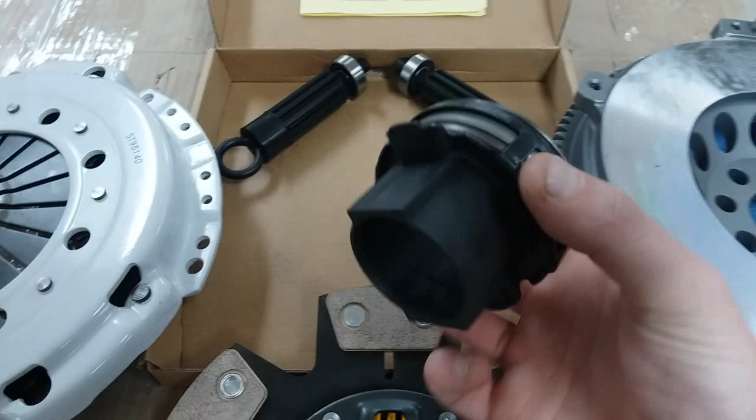The only thing in here that is not good quality, there's two things. This kit includes a replacement throwout bearing and 2 sizes for pilot bearings because the E36 had 2 different engines and stuff. So I went to FCP Euro and just bought a better quality throwout bearing because this one seems fairly cheap, I don't want to use it. Then also these pilot bearings - this is going to be my size here.

I was inspecting it, and it says made in China - right there's China, and the brand on it I think was WJB. I know it's not going to focus on it, but I did my research, and there's not much information on these out here besides them being sourced from China. So I do not want to use cheap bearings.

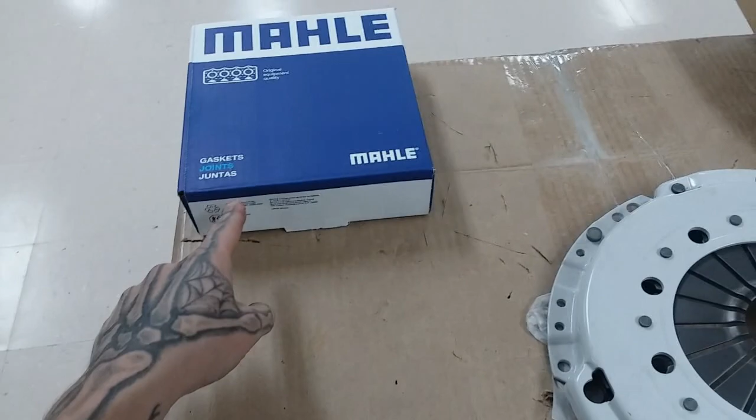So I got new ones overnight shipped from FCP Euro. Also got a new Guibo from them since my other one's too big. And then we also got a new rear main seal. That'll be going on first before the clutch kit, and then the new pilot bearing will go in before the clutch.

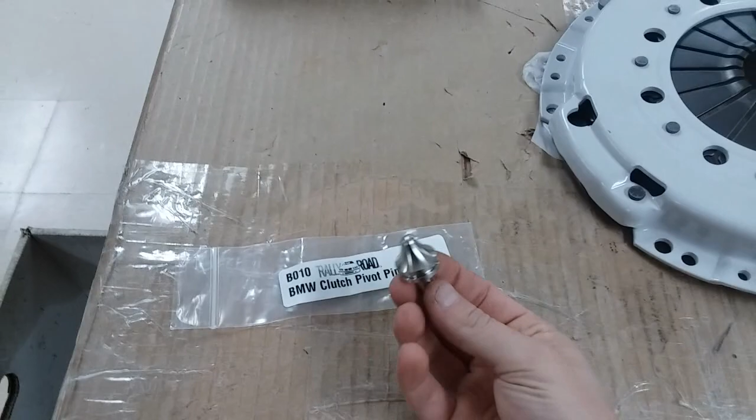I also got a stainless steel pivot pin from Rally Road. This is an upgrade versus the stock one. Since this clutch is going to be a lot stiffer to actuate, there's going to be more stress on this pin. So instead of going with the usual brass one, I looked them up on some forums - people complained how they wore and how soft they were. So I went even harder and got stainless steel. This thing should barely wear down, if any, so that's a good upgrade. It's from Rally Road, awesome website by the way.

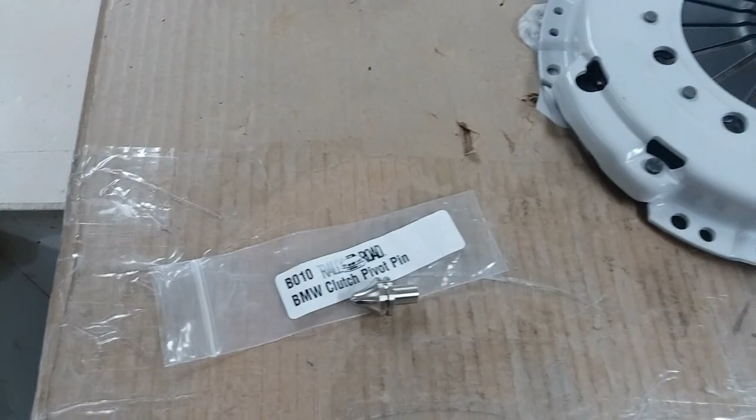So yeah, this clutch should hold fairly well for the time being until I can afford the twin disc once I get moved into my new place. The next clip you'll see is probably me installing the rear main seal. So once I get changed and over to the garage, I'll get right on it. I'll see you guys soon.

Alright, and here is our new rear main seal installed on the engine. If you're going to install this rear main seal while it's on the car, I had the housing and everything off, so this gasket back here is new as well. Now, since the engine is mounted kind of sideways, and whenever the oil pan's full of oil, your oil level is going to be right here, right at this crevice. So when we have this all apart, you obviously want to make sure the mating surface is nice and dry for the new gasket maker.

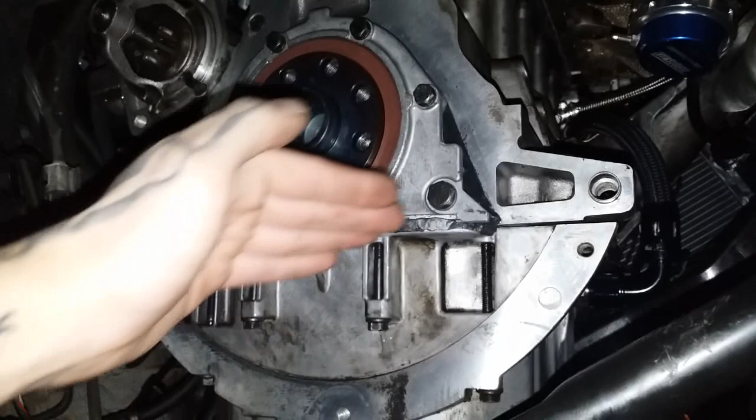It was impossible since the oil was right here, it kept making everything damp. So I had to drain the oil - I need to do an oil change anyway.

Another reason why I drained the oil is because BMW uses thread sealant on their flywheel bolts right here, because the rear part of the crankshaft, as you can see, is hollow. So I imagine if it really wanted to, oil could walk through the threads of the bolts and slowly make its way into the transmission. So BMW uses a bunch of thread sealant.

So what I did was I made sure I got these threads nice and clean and dry for the sealant I'm going to apply. I had to use a bunch of brake cleaner through every hole, and then I had to take a pick and break some stuff out of there and everything - it took a few minutes. So with a bunch of brake cleaner now in the engine, I wanted to drain the oil. Brake cleaner evaporates, but still I had quite a bit in there, so I just wanted to drain the oil to make sure.

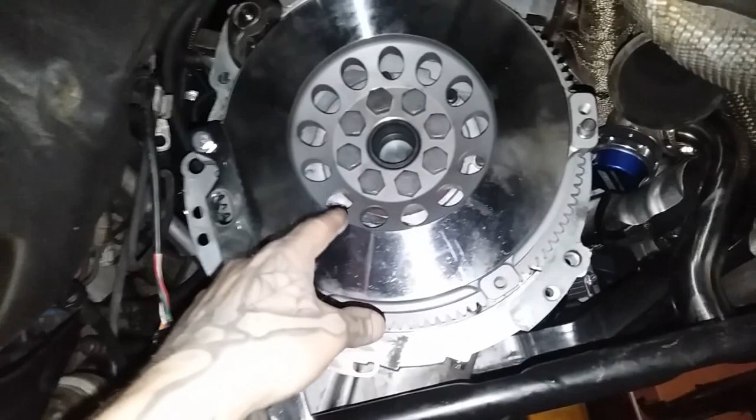Here we have the single mass flywheel now bolted onto the crankshaft. Okay, so what I did was I put the flywheel up there. Since there's a dowel pin in the crankshaft, there's also going to be a larger hole in the flywheel. Just line it up, stuck it on, and that held it. Then started a couple bolts by hand after adding my thread locker and stuff, the thread sealant.

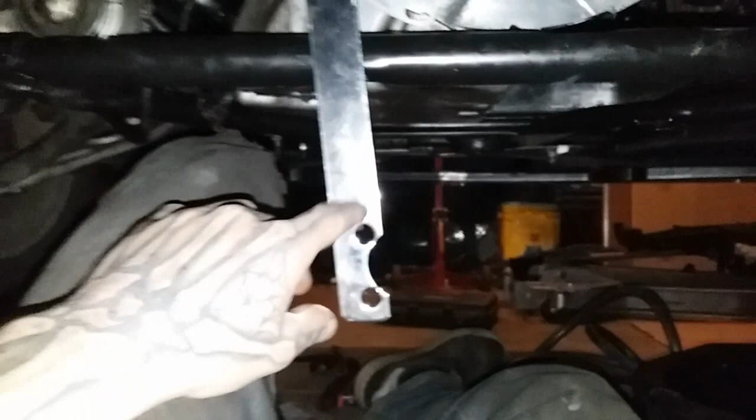And then once all the bolts were in, on the lowest setting on the impact gun, went around and did some quick zips just to get this flywheel seated. And then since I'm by myself and I needed a way to torque all the bolts, I just got a piece of metal. This just so happens to be a fan clutch removal tool for E46s and Audis. And I bolted it to the flywheel using an old bolt. And then these pegs that hold the pressure plate, I just rested against that. And then used my leg, like that, to anchor it while I was torquing all the bolts.

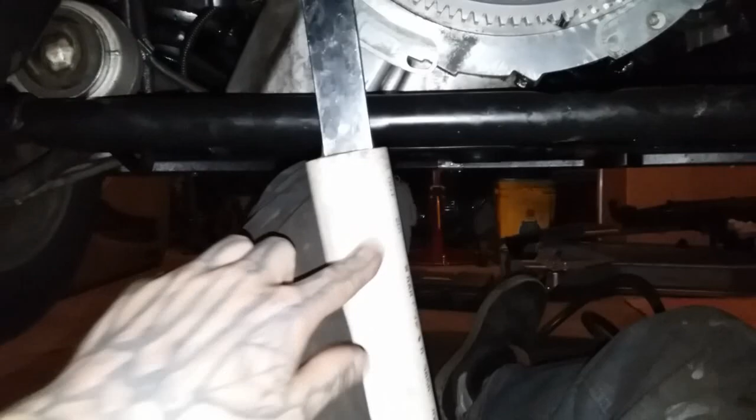Now, this hurt my leg, so I just got a piece of PVC pipe here and kind of sleeved it over like this, and then rested that again like that, and that was a lot more comfortable. It worked freaking amazing. So you can see, look at that, I'm moving it with my leg. So your legs are pretty strong. So once that was held by my leg, I put the torque wrench on here and had both my hands free to click, click, click, go around and tighten them. Okay, so that was basically it.

Now, if you guys install a single mass flywheel or twin disc clutch or whatever, it's very important to contact the company that you bought the clutch kit from and ask them what torque specs to use if the instructions don't specify. So I contacted this company and they just used the stock torque specs. The stock torque spec for this was 77 foot-pounds. Just to be safe, I cranked it up to like 81, 82. Because it is a single mass, it could be a little more harsh. Don't want any bolts backing out.

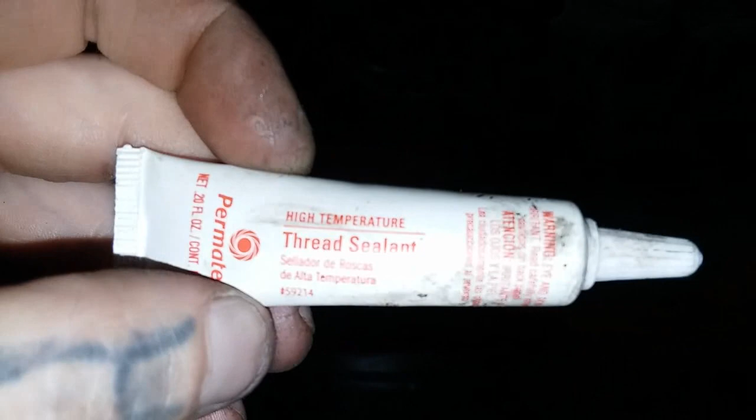So I decided to use some thread sealant on the first couple of threads, this stuff, and then after those couple threads, I used some high temperature thread locker and high strength thread locker. So this flywheel should be solid now. All right, now it's time to install the clutch disc and pressure plate. I got my pilot bearing installed.

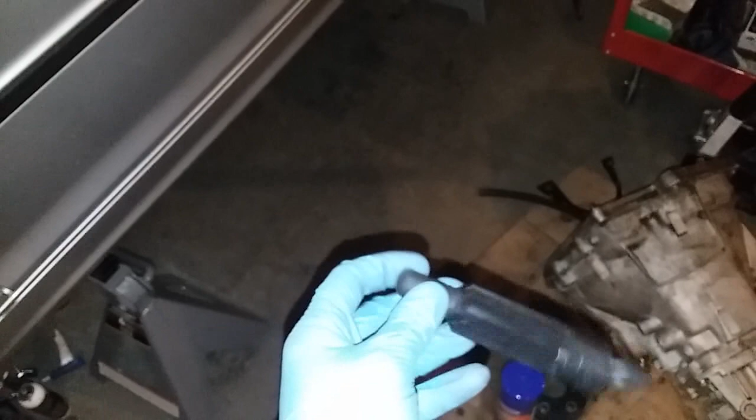This clutch alignment tool that was included in my clutch kit was very loose in the pilot bearing, it was just wobbly. So I tried black tape and everything else, but I couldn't get it to fit properly. So I just put a piece of heat shrink over it, and I worked the bearing back and forth. See how it scrunched this? The bearing should come in about this far now. So this is a lot tighter fit with that heat shrink on there. Now I'm going to install the clutch disc and pressure plate.

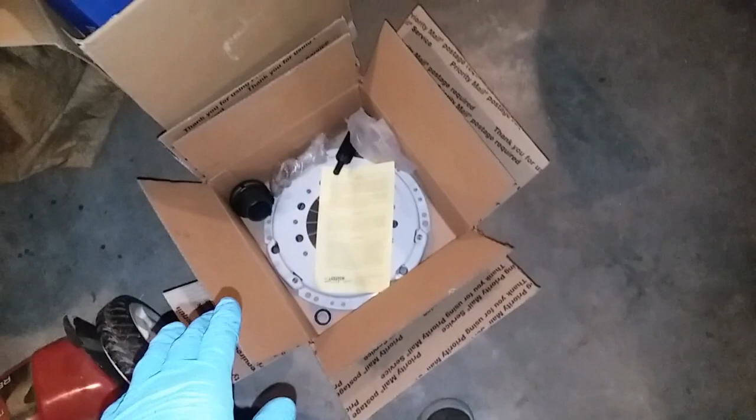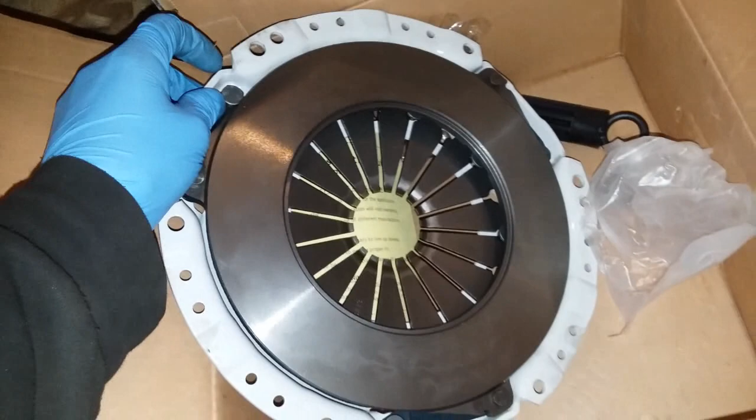But before that, you want to clean off the flywheel with some brake cleaner and clean off the contact surface of the pressure plate, this contact surface right here. Whenever they ship this stuff, they put a rust inhibitor on it, and you do not want any grease or any kind of oil on those mating surfaces. So I get everything cleaned up, and then I'll put the clutch disc in and then the pressure plate. Another thing is to make sure before you put your clutch on that your clutch disc does indeed fit your splines. That's very important.

Before you go ahead and seat your clutch disc, it's always a good idea to double check and see if the company has written on the clutch disc what side to face the flywheel. And thankfully, this company wrote flywheel side for me. So on this particular clutch, the protruded end of the disc will go into the flywheel.

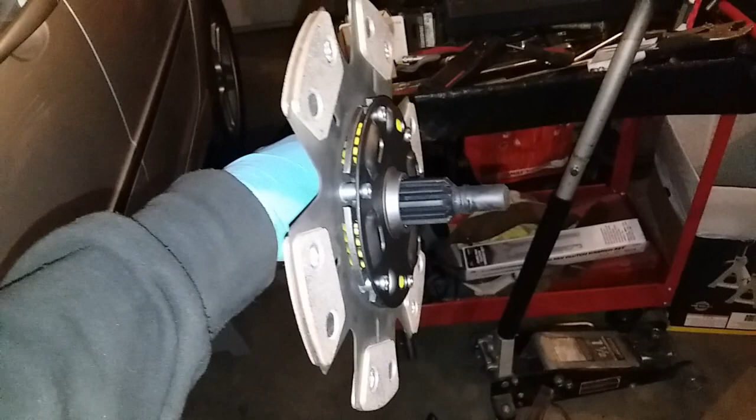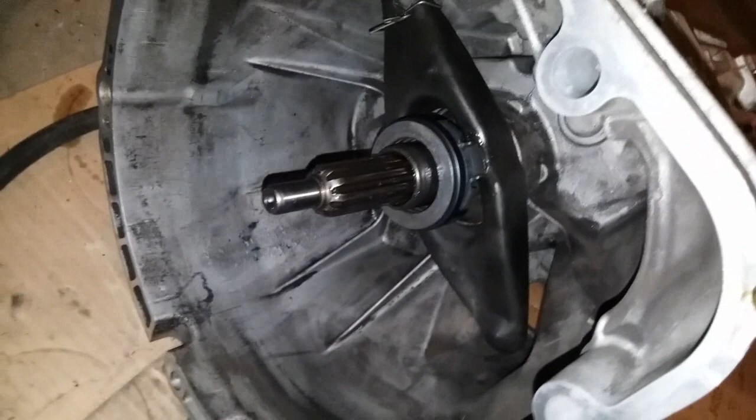Some companies don't label their clutch discs, so I've seen on forums people put their clutch disc backwards. And what happens in these cars if you do that, the throw-out bearing guide tube will actually hit the clutch disc, so that'll cause binding and everything. So yeah, just always make sure you're putting on your clutch disc in the right direction. I'm going to put this thing in, and I'll be back in a few seconds.

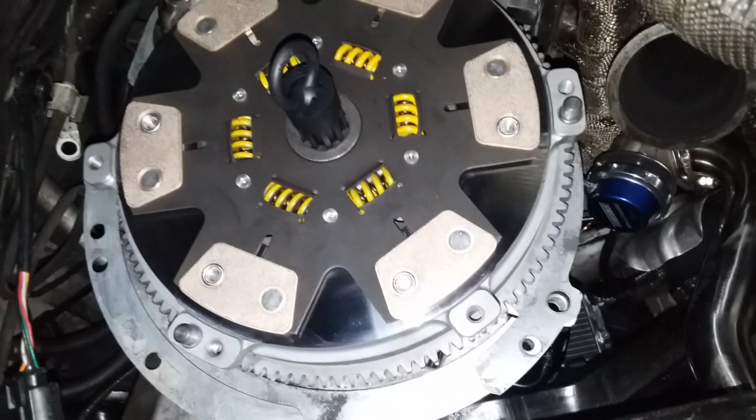And there is our clutch disc installed into the flywheel. Got our tool holding it nice in the center. I'm going to prepare the pressure plate now, clean it, and then put it on.

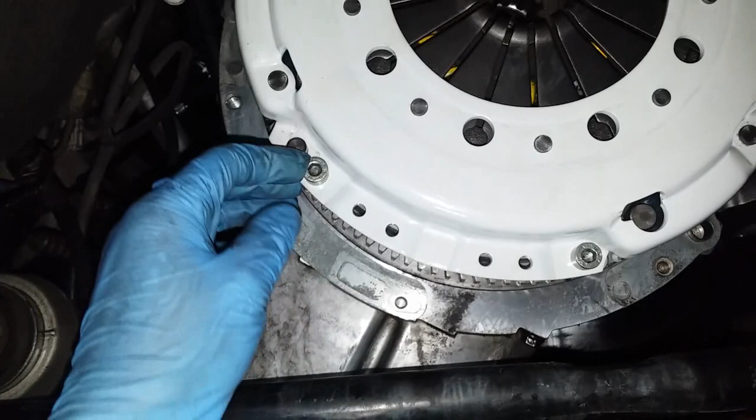And here is our pressure plate installed onto this clutch. Now, the torque spec they called for was 25, but I added 5 more, so now they're 30 foot-pounds. And I also added some thread locker to these bolts. Usually use blue, but I decided to use red just to be safe.

Usually, also, I do not recommend reusing pressure plate bolts, but since these are stainless steel and high-quality bolts, they're just fine to reuse. And always make sure you're tightening in a crisscross pattern to evenly get the pressure plate to clamp down, because you don't want to start here, just like you're tightening a wheel on a car. You want to get even torque.

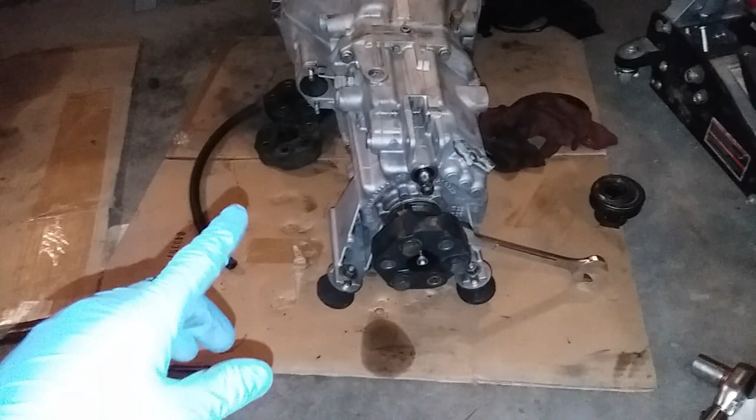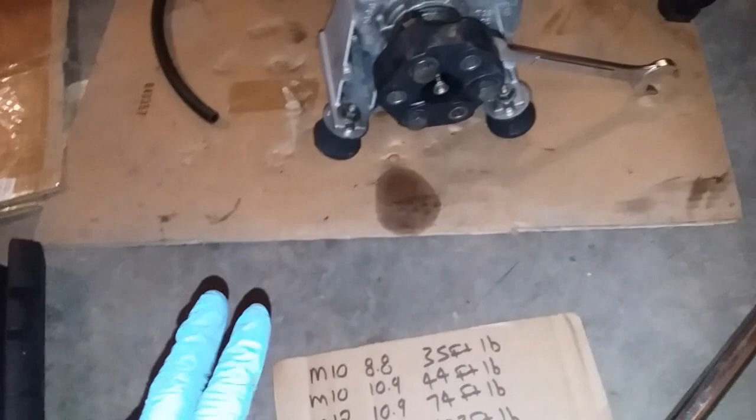Okay, so currently I am preparing the transmission before it goes back into the car. So working at the back, right now I am installing the new flex disc. So there's going to be 2 things to note. The first thing is going to be what torque spec you use, and then we'll get to that in a moment. The second thing is, if your new flex disc has these little arrows on them, you're going to have to make sure you install it properly.

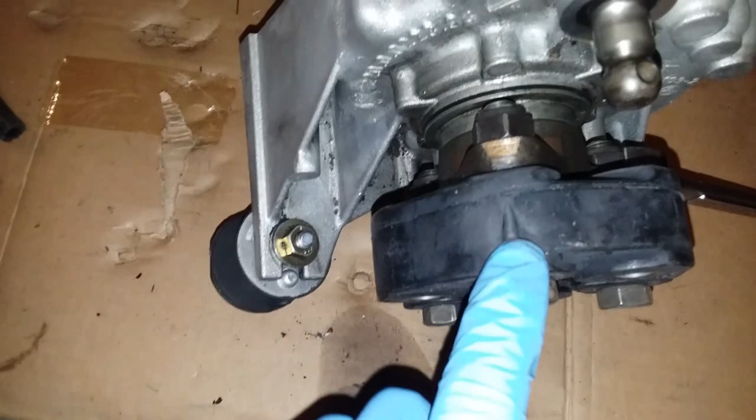So these little arrows here always point towards the flanges that they're mounting to. So this arrow is pointing to the flange of the transmission. And the next arrow, let me spin this, it'll be pointing back to the flange on the drive shaft. So if the back of this arrow was facing this flange, that is wrong. It is incorrect. So you must make sure your arrows are pointing to the flanges on which it is mounting.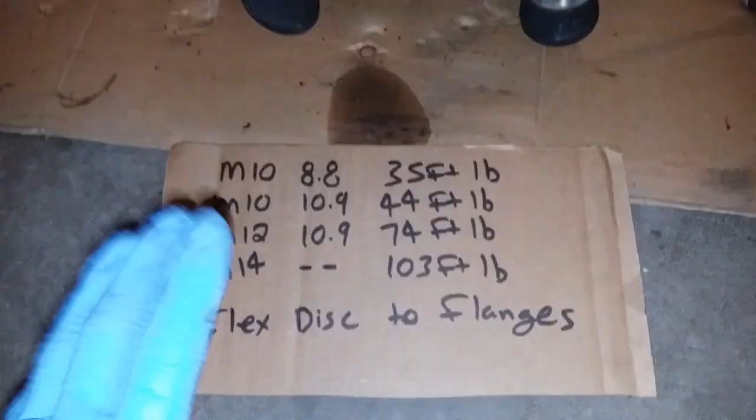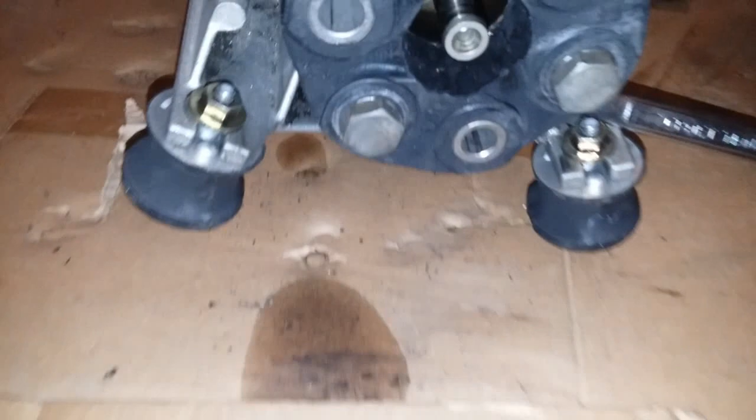And then the torque spec thing, there's actually a wide variation of torque specs for these bolts depending on what bolts you have. This is the size, so M10, M12, M14. The more common ones, at least I believe so, are going to be this torque spec right here, 74 foot-pounds. This is the more common bolt. So just by looking at the bolt, you inspect it, and you'll be able to see the numbers on them.

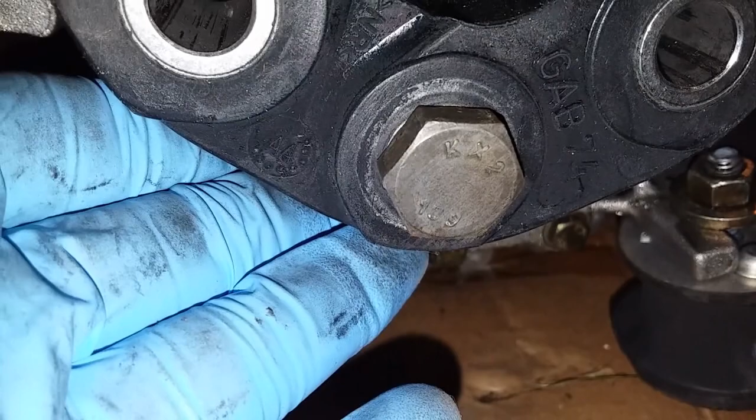I don't know if you'll be able to read them or not, but these are indeed a 10.9. See the 10.9 on there? On the bottom? It's a 10.9, and is the M12 bolts. So my torque spec is 74 foot-pounds. I'll just leave this up right here, so in case you guys want to screenshot it or whatever for a few seconds, so you guys can see.

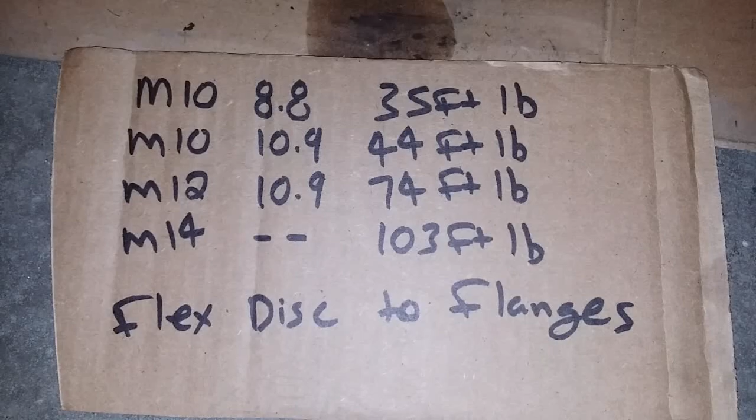Alright, so those are all the torque specs for the flex disc. So I'm going to torque this down with my torque wrench, and then I'm going to go to the front and install my throwout bearing and the pivot pin there and all that.

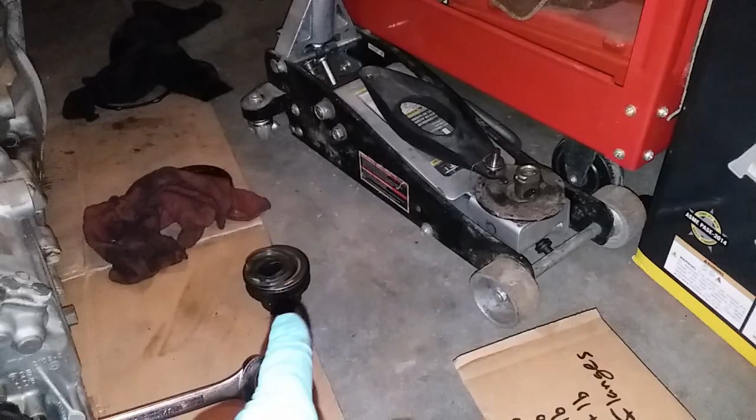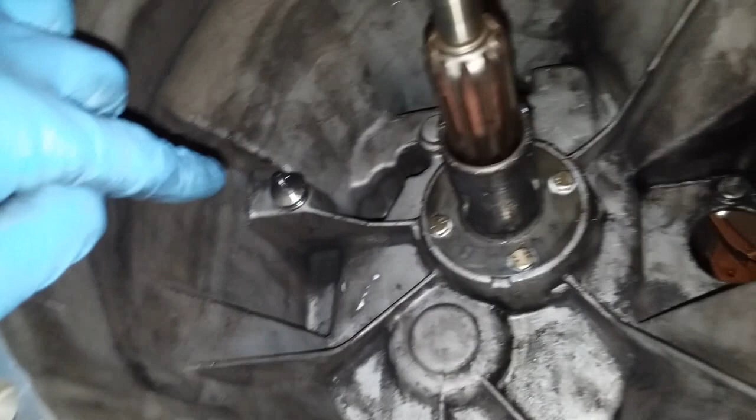Okay, now we're working at the front of the transmission. Just installed our stainless steel pivot pin, and I have some grease on it. And then I did replace the input shaft seal yesterday and reinstalled this guide tube with some thread sealant on each bolt, because that's how it was from the factory. Now I also have grease on the guide tube. Lubed up the throwout bearing. It's nice and greased up.

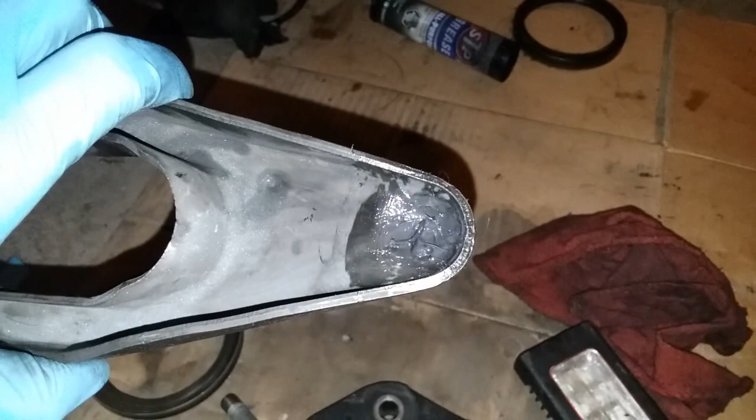And then our clutch fork, both sides are greased. Ideally, you want to use either a Q-tip or a flathead screwdriver to get a nice ball of grease right down that little hole. It's hard spreading with your finger because it just sticks too much, so you want to use some kind of tool to actually get it in that hole. So now I'm going to install the clutch fork onto the pivot pin and then put the throwout bearing in. And that's going to be simple as that.

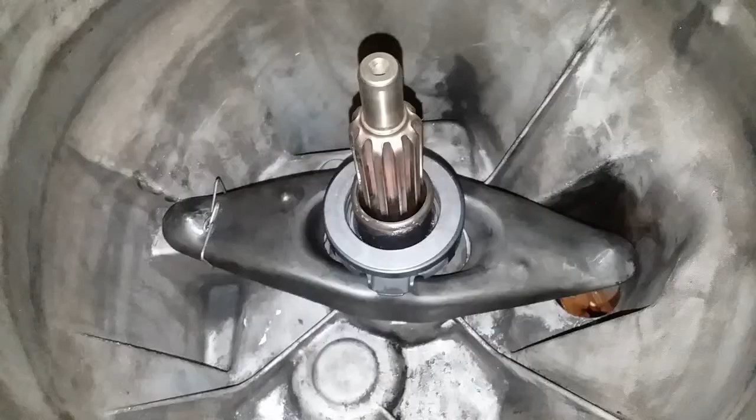We're back now, and the clutch fork and throwout bearing are installed into the transmission. Now, usually you want to install the pin onto the fork with the spring and then put it in, but in this case, the stainless steel pivot pin was a very tight fit in there, so I actually had to take a socket and extension and pound it down because it's supposed to sit flush on that lobe down there.

So then I put on the fork over top of it. It was kind of a struggle getting the spring over. So I mean, what you could do is you could probably take a drill and slightly notch out that hole some so it fits in there nice. But this worked out fine.

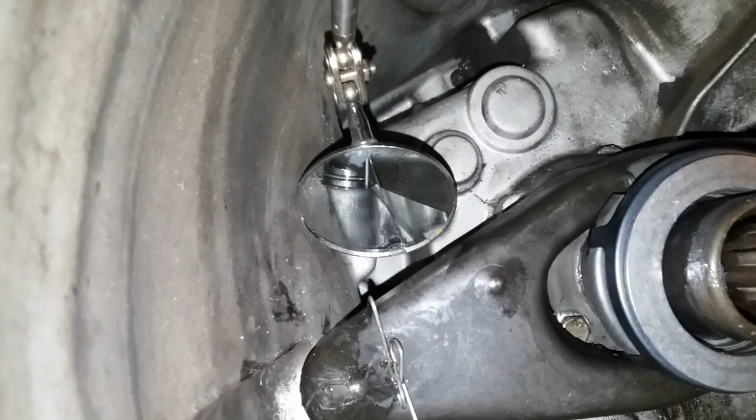And then just to verify you got a good fit, make sure the spring didn't pop off from underneath. Just take an inspection mirror. See the spring's in the groove still of the pivot pin. So that's important so it doesn't fall off. So yeah, it's always better to have the pin on and then put it as one assembly in. But sometimes, I mean, it worked out either way.

You also want to put some grease on your splines here. As you can see, my grease is black. So I actually have it inside the splines and a very thin film on the outside, so the clutch disc can slide in there nice and freely. And then also a nice thin coat of grease on the tip of the input shaft, because the bearings are pretty tight tolerances and they fit on there just right. So you want to make sure you have a little bit of grease on there so the transmission slides back onto the engine nice and freely.

The transmission is reinstalled. Yeah, I tried using my transmission jack, but it was too big and bulky, so I literally installed this transmission by hand. I just picked it up off my body and slapped it onto the engine, went on nice and smooth for the most part, and then reinstalled the cross member, which I cleaned up a couple days ago.

Now the next step after that was to install the selector rod again, and then now I'm going to install the drive shaft. One thing to note is that your drive shaft during removal will sometimes seize on here because the middle portion gets corroded and a little cup sits in there, so it rusts up. So I had to beat it off with a hammer, a couple good hits, and it finally came off. That with a pry bar too.

So what I did was I did a quick brush and put some grease on the outside here. This is actually a mix that I use all the time. There's the bucket out there with the paintbrush hanging out. That is a mixture of ATF and grease. It leaves a really nice consistency, and those two together are a nice rust preventative. So I also brushed off the back of the drive shaft and I also added my mix to it, so it's going to assemble nice and smooth now.

And then I'm going to show you the proper torque specs for these bolts, depending on which differential you have and stuff. And I'm going to show you how to properly install the drive shaft and how to properly preload the carrier bearing. Because a lot of guys just throw the drive shaft back on. You're supposed to do what's called preload the bearing, and I'll show you how to do that. And then we'll get these bolts nice and torqued up. So yeah, let's get the drive shaft in.

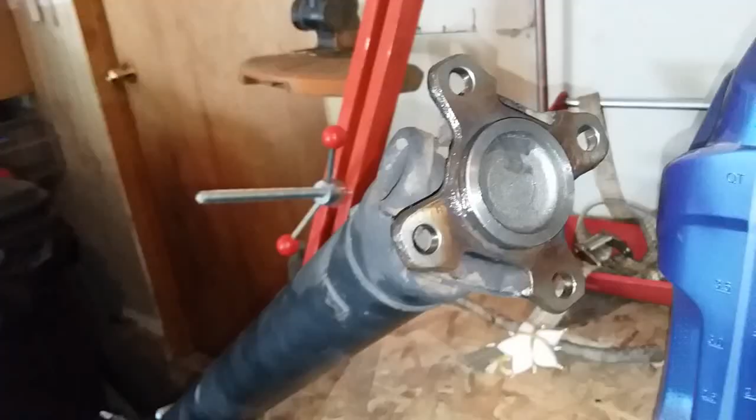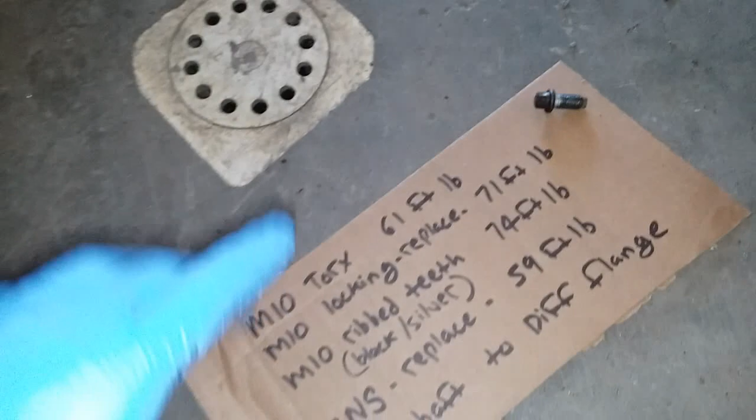Here is that section of the drive shaft I was talking about. This mounts to the rear differential. It's this cup right here that corrodes and gets stuck in the diff mounting flange. So as you can see, I brushed it off with a wire brush and my lubricant is on it. And now the bolts. Keep in mind my drive shaft is the 4-bolt mounting. So here are the torque specs. In my case, there's one of my bolts right there. I have the standard M10 Torx, so 61 foot-pounds.

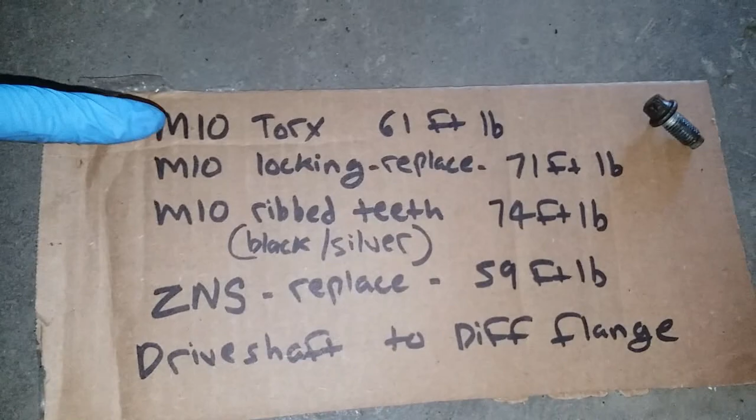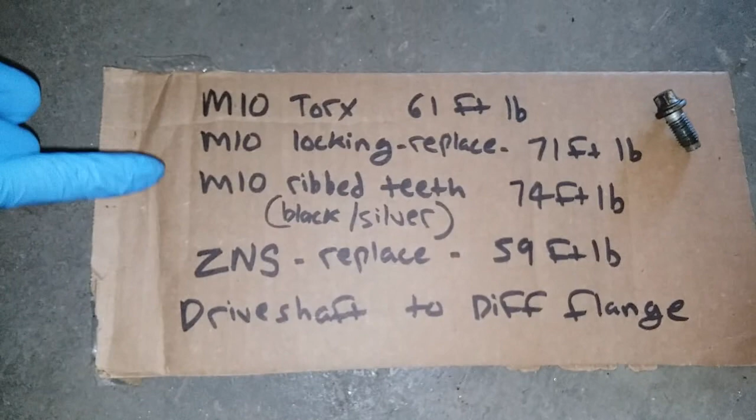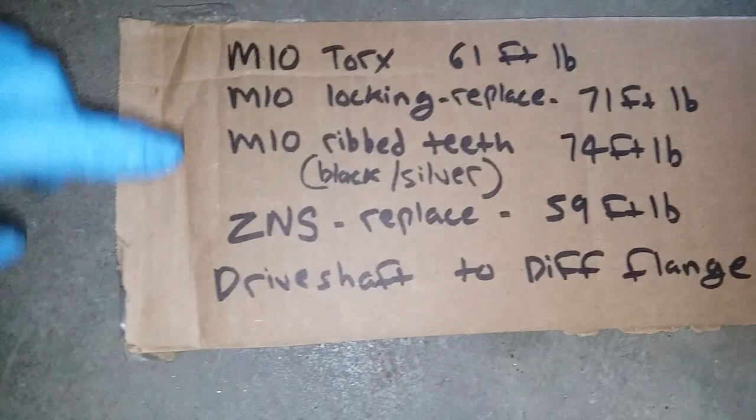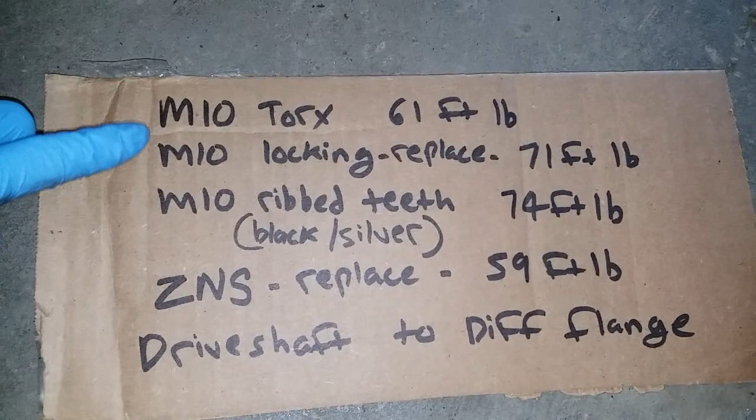That's my bolt. And there's also a wide variation of bolts and drive shafts for the E46 chassis. So here are all the proper torque specs for you. ZNS bolts are bolts that are only made to be one-time torqued. Usually they'll be marked with a blue dot on the head. These aren't those, by the way. I'm just giving you an example. They're called ZN bolts. The S just means silver in this case, so it'd be silver with a blue dot or a yellow dot, one of the two. And there's the other ones. There's mine. These will have a locking head, so I'll replace those two. Then there's these two different colors, same torque spec. So there you guys go for the rear diff.

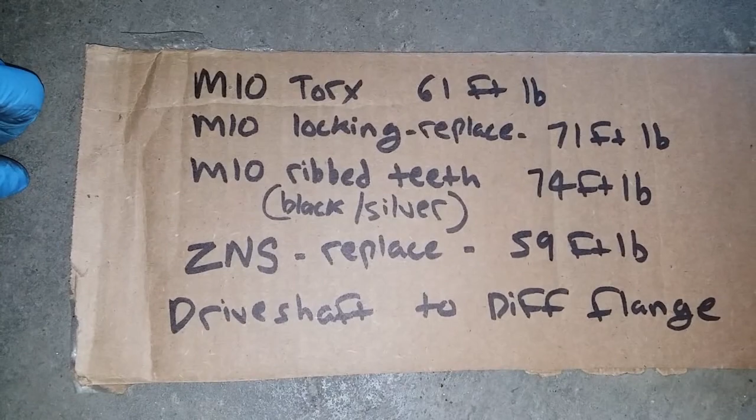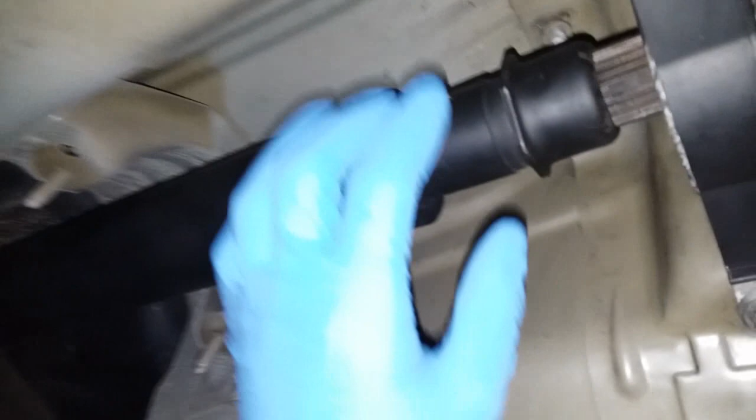Here we have the drive shaft now mounted to the car. So to install this, you want to go ahead and mount the rear flange first and torque it. I just used my parking brake and it held just fine. Then rotate it as needed. Then this locking collar should already be loose from disassembly of the drive shaft off of the car. But if it's not, just make sure it's loose right now.

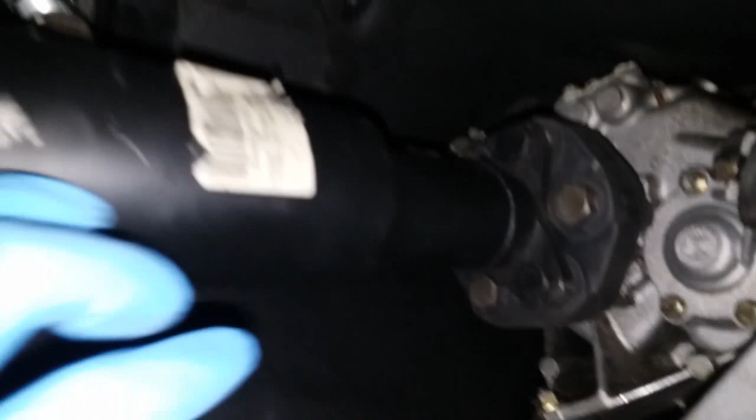And then you're going to go ahead and compress the drive shaft. Compress it so you can mount it to your flex disc. So once it's in line, go ahead and extend it again, so it's sitting flush on here on your flex disc. And then torque these bolts.

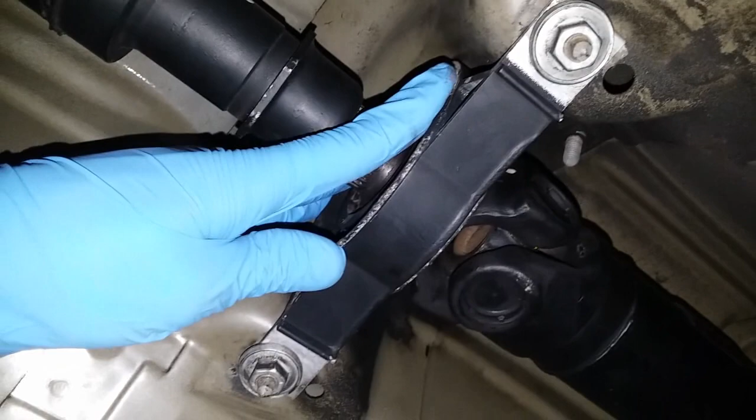Remember, those are 74 foot-pounds on this application. And then the last part is, don't tighten this just yet. Leave it still loose. Now you go ahead and make sure your carrier bearing is up there and not tightened yet, just snugged, because we have to do what's called preloading. What that involves is sliding the bearing forward 5 millimeters, so roughly 1/4 of an inch. So you're going to grab it, slide it forward, and then tighten it.

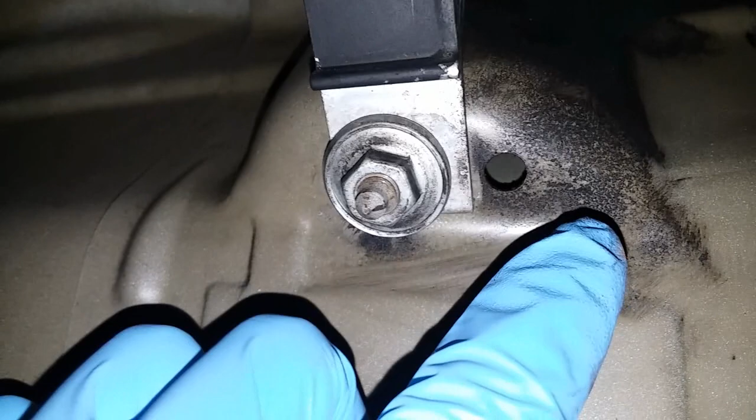So as you can see, when it was previously installed, see how the car's dirty and then where it's clean. So it was installed correctly the last time. Somebody actually preloaded it. So right there's where it needs to be. I'm just going to put it back where it was. So you can see that with it just resting normally, it's back there. And then with the preload, it's going to be right there.

So same thing on this side. See how it's dirty and then clean? So I'll preload it. Just got to do both sides. Just like that, and then you tighten it. And that's preloading. So once again, install the rear first, torque it. Make sure this is loose. Compress. Extend into the flex disc. Torque. Go back here. Set up your center support. Leave loose. Preload. Torque them. Torque spec is 15 foot-pounds.

And then the final step. And then you tighten that. The torque spec for this is 7.4 foot-pounds. So it's like nothing. Might even be inch-pounds. Let's go check. I have it written down. I'm pretty sure it's foot-pounds, though. Yeah, there's the center support, 15 foot-pounds. Oh, 89 inch-pounds, which converts to 7.4 foot-pounds. So yeah, that little clamping sleeve is just hand tight. And that is the finished product of the drive shaft.